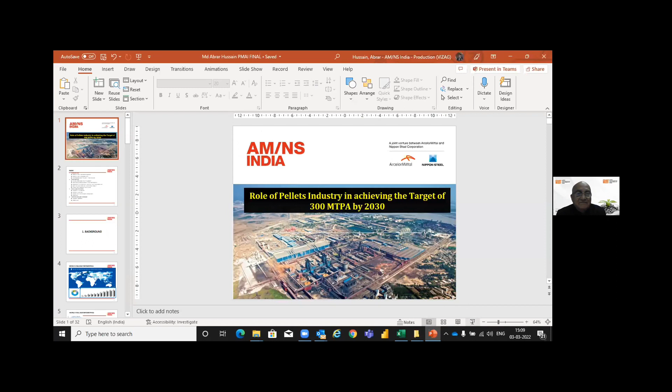I'll be talking on the topic, mostly a kind of summarizing thing: role of pellet industry in achieving the target of 300 million metric ton per annum by 2030.

This is how we go about the thing. We look at the global steel environment, then touch upon our government's vision and efforts, and then narrow down to the global pelletizing scene and pelletization's role in fulfillment of the national goal. Then in further detail, we will talk about the issues impacting pellet operations in particular, and various efforts by the industry to overcome these. And finally, a kind of roadmap to achieve 300 million ton per annum by 2030.

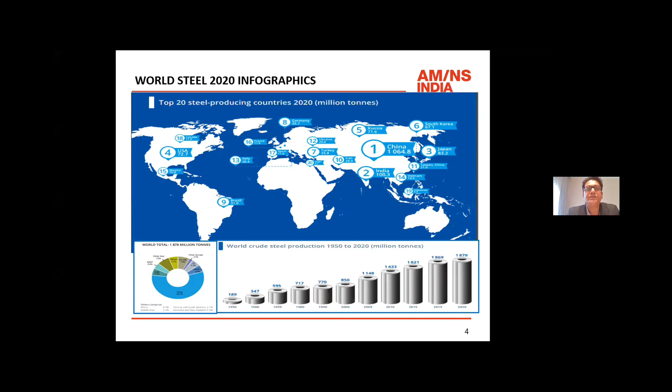This is a kind of steel production over the decades. If you just focus on 2010 to 2020, there has been an increase of around 30% in the steel production by all the countries. Then talking about the per capita consumption of steel from 2010 to 2020, we have again increased in the same lines as the steel production capacity, around 32%.

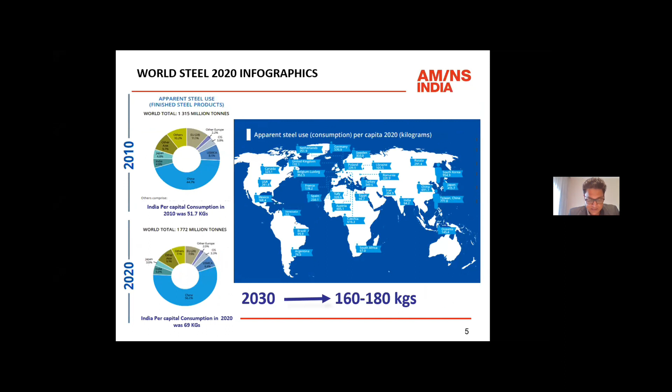Now the talking point is, by 2030 we are looking at a figure of 160 to 180, that's around 200% increase from where we are as of today. So these are the countries tabulated as per their production capacities, China sitting on top with 1,064 million metric tons.

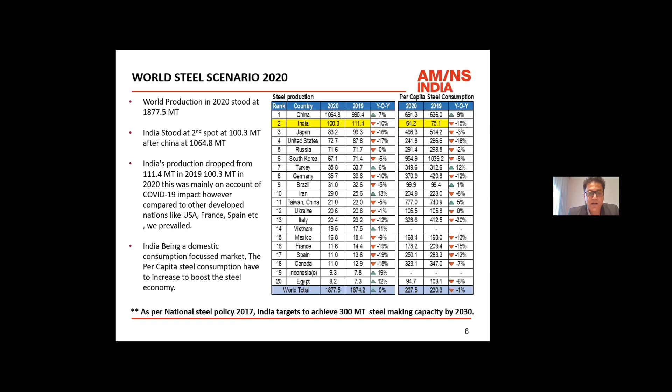And India is second with 100 million ton capacity. The gap between these two countries is seen more as an opportunity for growth, and our national steel policy is framed around this to actually boost the industry.

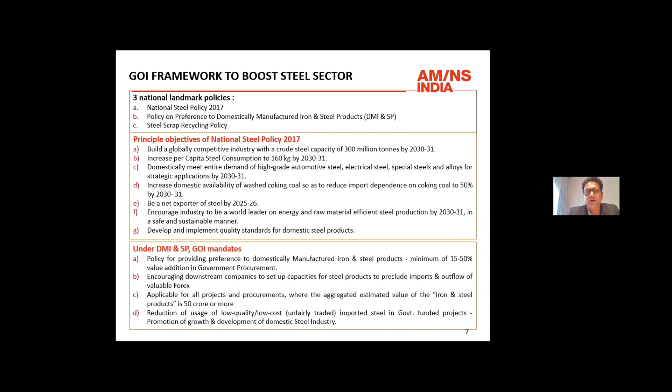So this is what the Atmanirbhar thing is all about. It's speaking about boosting the steel sector, and then we are talking about the principles of being globally competitive, then increasing the per capita consumption to 160, then domestically meeting the total demand of steel, then becoming a net exporter by 2025, and becoming a world leader on energy and raw material efficient steel making process. Our mandate would be to preferentially become a domestically self-sufficient steel maker. So this is what the concept and our today's topic is centered around.

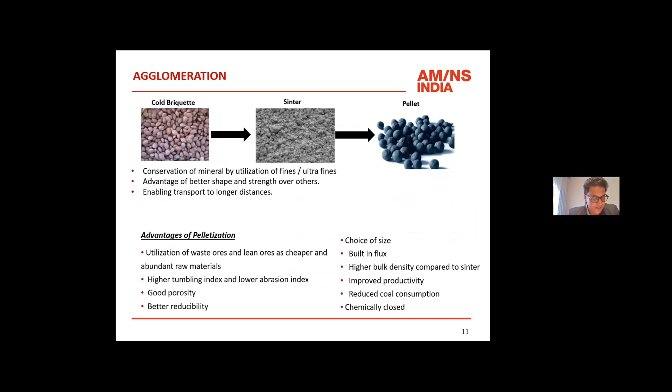This is our journey as far as agglomeration is concerned. We started with cold briquetting, then sintering, and pelletizing. Pelletizing over the years is going to stay, and has formed the main stay for the agglomerating process. The advantages of pelletizing over other agglomerates will make it the best choice.

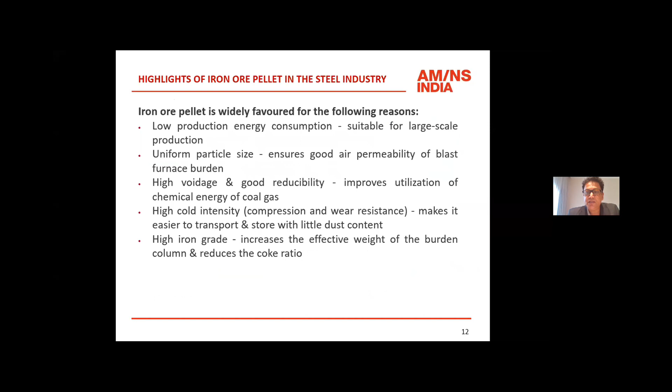With respect to the highlights of iron ore pellet, it is going to be a low production energy consumption process, with uniform size, and much talked about metallization properties like good reducibility and ease of transportation. These are going to be the highlights of the pellets.

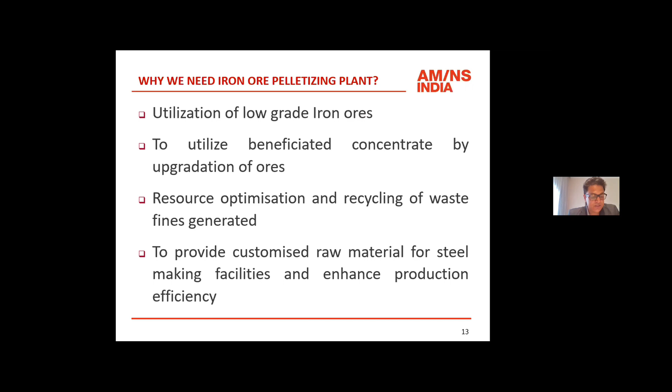With respect to the importance of pellet in the present context, for utilization of low-grade ores to produce beneficial concentrates, resource optimization and recycling, and to provide customized raw material solutions for steel making, pellet is going to play a very important role.

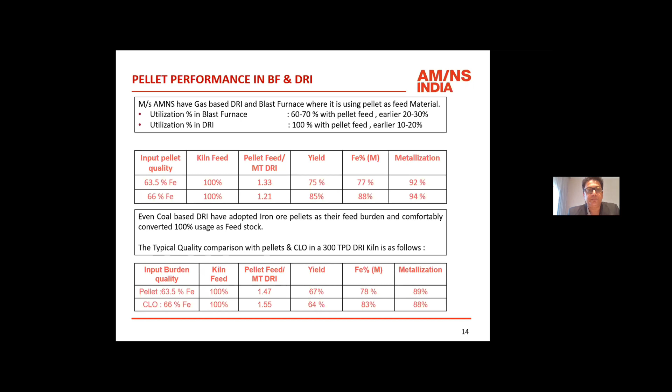The bottom table shows how pellet actually competes. A 63.5 pellet Fe competes with a 66% Fe lump ore, and how close it comes to the performance with respect to a higher grade lump ore.

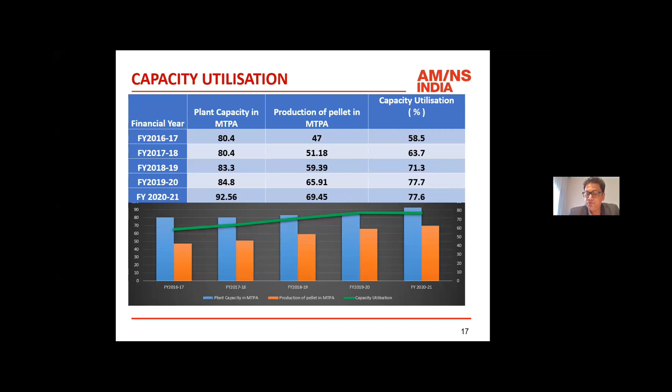So now we move on to the issues and concerns in the pellet industry. Capacity utilization will remain the major constraint. If you are talking about 92.5 million tons of installed capacity, we have utilized only 77% of that, amounting to 69.45 million tons. This is mainly due to design versus operating conditions existing in almost all pellet making facilities. In our case, our plant was designed with 67% concentrate, against which we are operating at 65.5, with a designed loss on ignition of 0.9, but we are operating at 2.2 plus loss on ignition now.

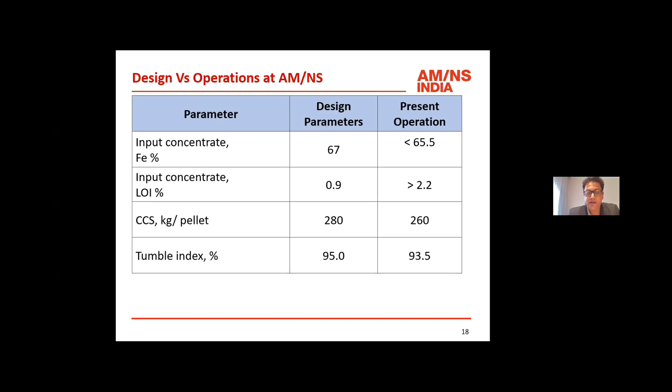The pellet quality itself, designed for 280, the physical properties have also taken a hit because of this. You can see the concentrate quality has actually dipped over the years, with gangue matter going up, silica and alumina going up, and the pellet Fe dropping over the years.

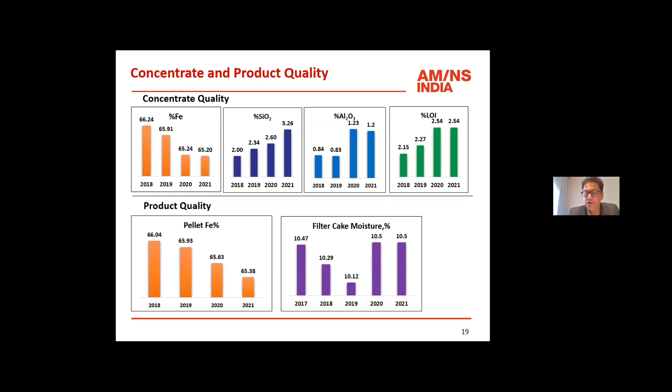I have mentioned filter cake moisture particularly here because it is the first intermediate product in our pellet making, which despite introduction of latest technology is still hovering around 10.5 against the design moisture of 9.5%. In pellet plants, every process has an impact on the subsequent process, and the final quality depends on the overall efficiency of all the individual processes.

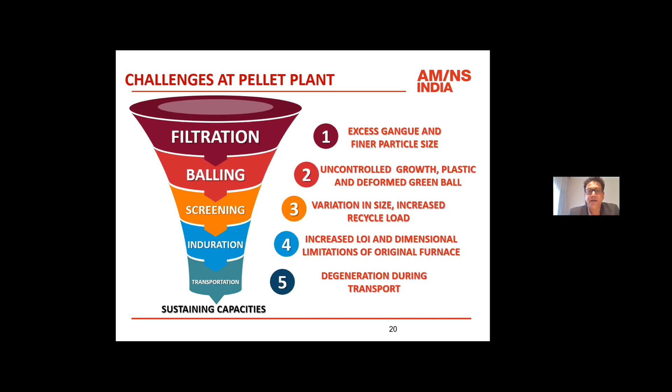So these are the main challenges, process wise. For filtration, we have excess gangue and particle size issues. Then in balling, uncontrolled growth because of gangue matter. In screening, we have variations in size and recycle. When it comes to induration, the increased LOI and dimensional limitations of the original furnace were a big challenge. And in transportation, we have degeneration during transport. All these challenges have to be overcome to some degree by putting in efforts to sustain our capacities.

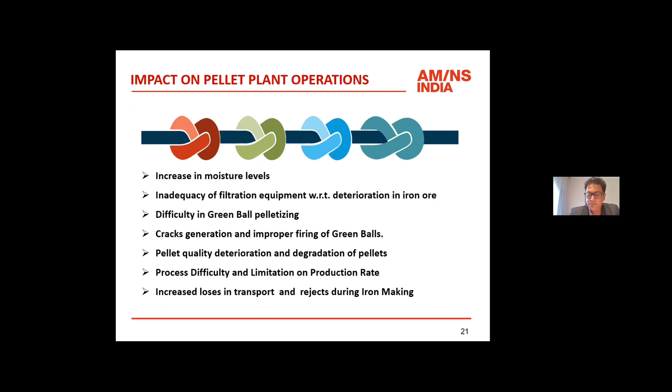So these are the impacts on pellet plant operations. I talked about moisture, then inadequacy of filtration equipment with respect to deterioration in iron ore, difficulties in green balling, cracks generation, and improper firing of green balls. These are the different factors, and ultimately we are not able to attain the production rates at which these plants are designed.

We have talked so much about the challenges and the impact. Now I'll touch upon the enablers for overcoming these challenges. So advanced technologies for filtration - we have moved from the conventional constant cycle vacuum filters to pressure filters now. This is a big enabler.

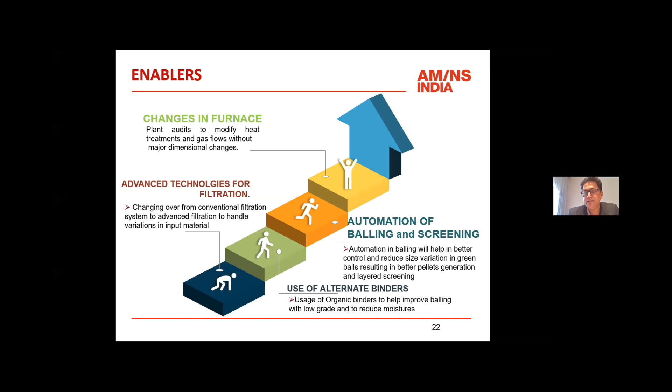Then use of alternate binders like organic binders and improved binders to lower cost during the processing of low grade ores, and also to reduce moisture. Then automation of balling and screening also will be a big enabler. And finally, furnace audits to actually modify the heat treatment and gas flow without major dimensional changes would enable us to regain capacities.

Most greenfield projects now are coming up with pressure filters. For our plant, it's a different story - we set up our plant in 1996, but constantly we have shifted from vacuum filters to pressure filters. Now almost 70% of our filter cake is generated from pressure filters.

Then in the industry, some plants use flexible balling equipment and screening equipment, where automatic angle adjustment of the disc is possible, automatic spray system, and the side wall of the disc itself can be adjusted. Screening has also been taken to the next level, wherein continuously the green balls are captured on camera, and the screening is altered as per the green ball generation and spread on the screens. Layered screening is another advancement that has brought confidence to the operator that some capacity can be retrieved. We actually feed the machine with oversized pellets on top and smaller green balls at the bottom.

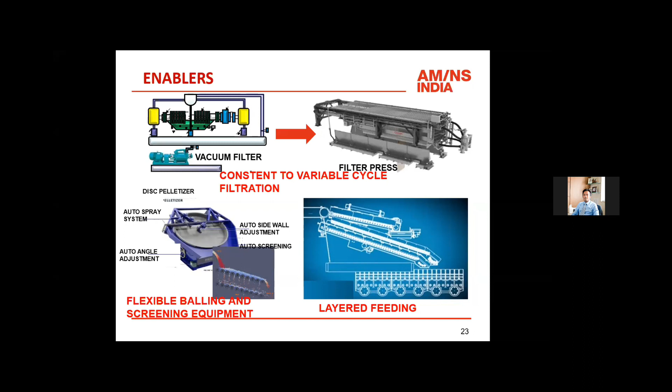So another place where a lot of improvement is taking place is balling automation, where closer monitoring with technology is seen as a solution to control balling quality and also increase productivity. Plasticity is one field. Around the world, plasticity is one field where a lot of intense study is going on, and controlling this is seen as a game changer, especially in traveling grate furnaces where permeability is greatly impacted by deformation and the plasticity of the green balls.

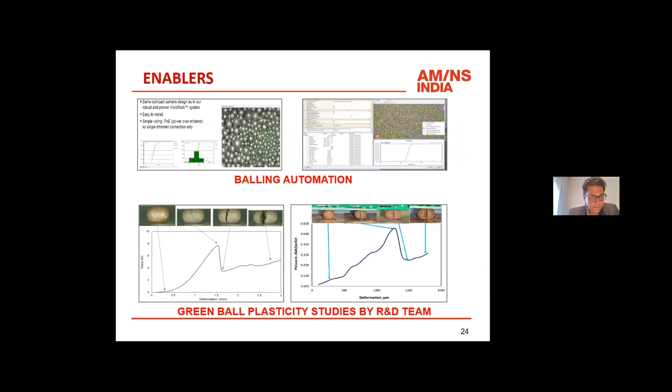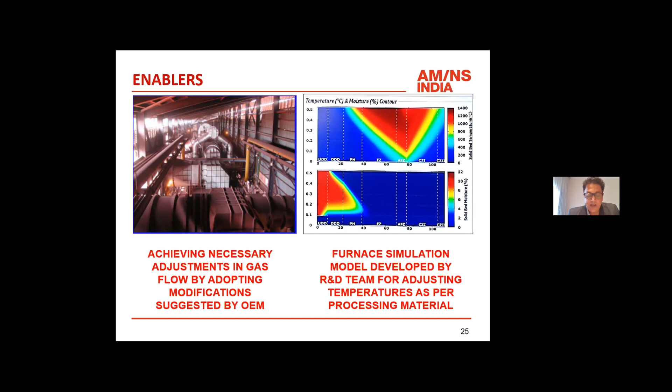Furnace audits and changing the gas flows with respect to the new material that we are experiencing is one more enabler, and this also will help in regaining the capacities. Furnace simulation with the various models to actually see inside the furnace how the heat treatment is going on, and how the heat front is traveling from top to bottom, also helps to process material of lower grades. So this is the furnace modification that we are going to take up.

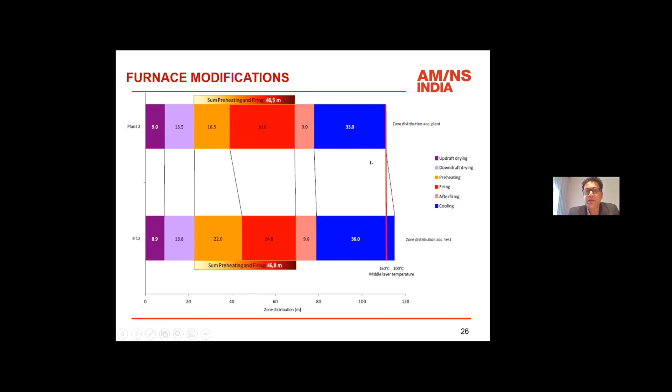If you see the preheating area, it is increased from 16.5 to 22 metres, without actually doing any major change in the furnace dimensions. So these are the progress at AMNS: introduction of pressure filters at various stages. From 2005 to 2022, we have introduced 4 pressure filters. Then we have high pressure burners to control the heat treatment properly. And then we have balling automation and furnace modifications lined up in 2022-23.

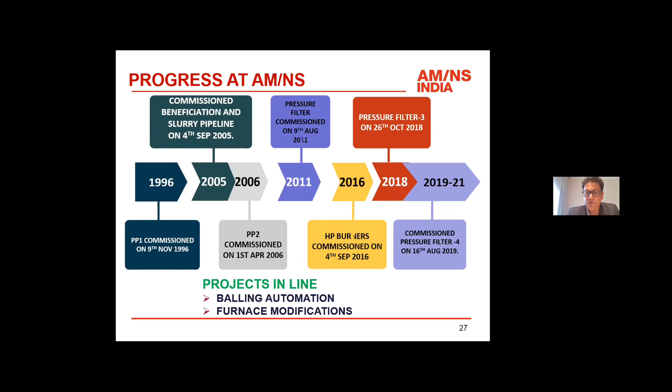So the bottom line remains to first tackle the issue of capacity utilization to the extent possible, and support the existing installations to operate at more than their full capacities. So support to the beneficiation process, which supplies raw material to pellet plants, support industries with the necessary lands and tailings, and also support pelletization plants which come up with an integrated setup of beneficiation, pipeline and pelletizing.

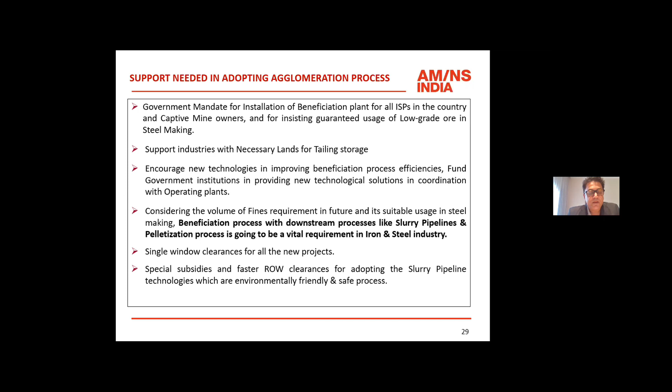So this is the way forward. 300 million metric ton per annum is what we are talking about. To do this, we have talked at length about expanding our resource base for processing lower grade ores and to sustain in the long run. Then sustaining the growth rate to enhance demand, if we have to experience the growth the government is indicating and grow as an industry together. Increased focus on R&D for low grade utilization, and support installed facilities to run at full capacities and expand. We need to firstly support the installed facilities, and then take advantage of their operational expertise to expand and to produce more.

Then create focused groups for national and international collaboration. What we are talking about is the kind of disparity which we are seeing in pellet usage within the sectors. So this needs to be closed. We can have exchange groups exchanging our knowledge within the sectors and increasing the pellet usage across the sectors. And we can also have focus groups visiting other countries to replicate their success story. So this is the way forward.